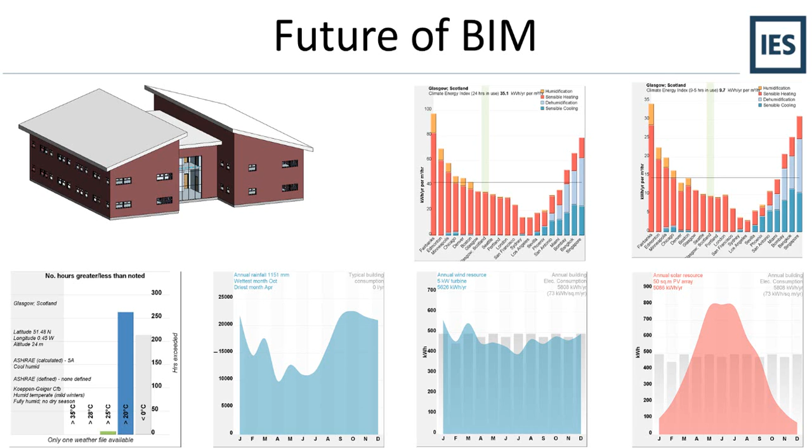So moving on from there, looking at how we see the future, instead of looking just at the asset in an isolated situation, we could look at the asset at a master planning level. For an office building, you could consider how far it is from transport links, or what's the nearest shops available if you're putting an office in a certain location within a certain district of a city.

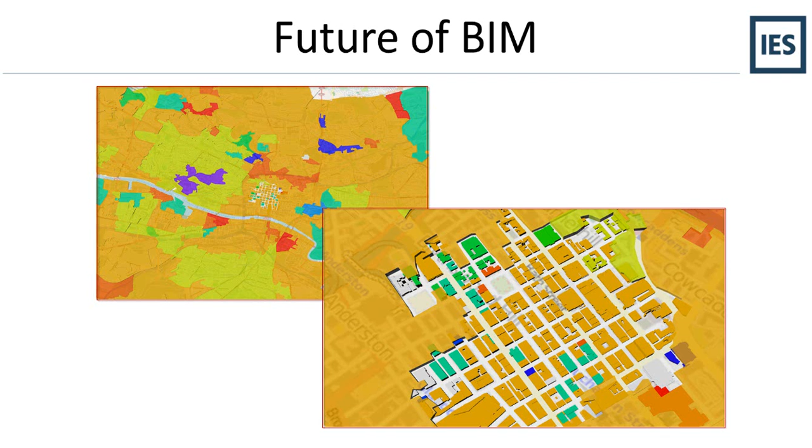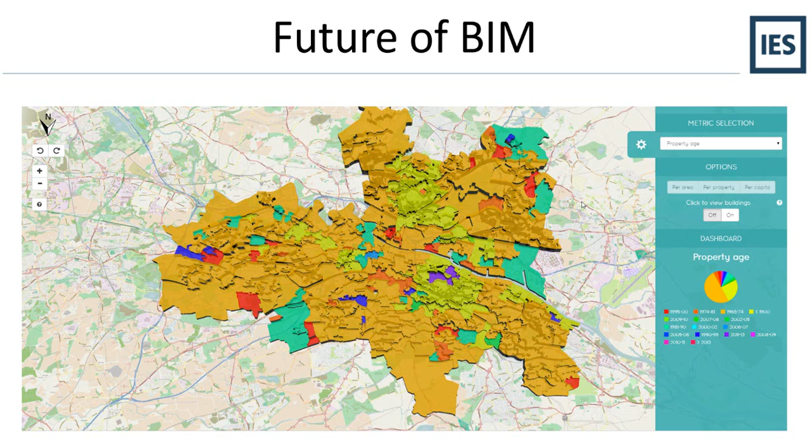That would be a district level. Taking it up a level again, we'd look at the city level - instead of a single area of a large city network, you would look at the whole city and the building performance and embodied carbon within that as a whole. That's where we'd see BIM going in the future, being able to access different levels of data, different levels of granularity, whether it be a single asset or multiple assets.

I'm sure the majority of you have seen this extract from PAS 1192 Part 2. Just a quick overview - you've got your central area here, governed by BS 1192 2007, which is basically your common data environment, the standard methods and procedures for taking a design from brief stage right through to operation.

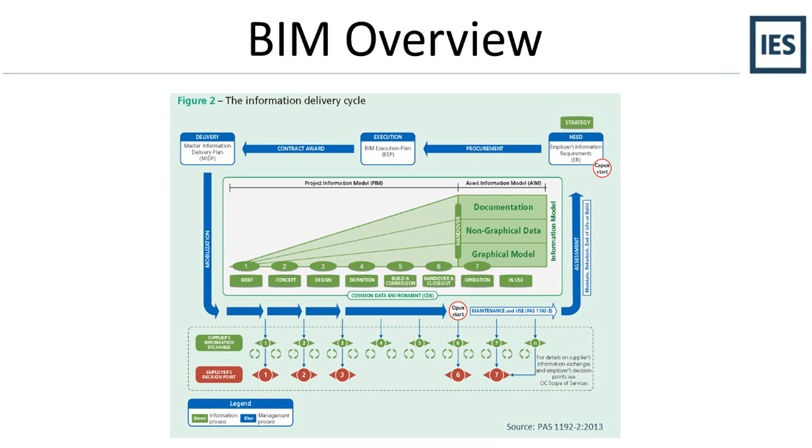You've then got the information delivery cycle in blue surrounding this, which is the PAS 1192 Part 2, Part 3, and other documents like Part 4. All these documents go together along with the BIM protocol and government soft landings to make up a set of standards, methods and procedures that allow you to deliver information with no data drop-offs from the very early briefing stage right through to operation. That's a small, brief overview of the BIM process and some of the documentation.

Now, this is another graph you've probably seen quite a lot, and the reason I want to bring it out again today is to highlight the position of building performance within the building information modelling process. You can see the blue line, line 1, is the ability for a team to impact cost and performance as you go through the project from early design phase right through into operation.

The red line, line 2, is the design cost of making these changes as you go through the process. You've got the black line with the hump in the middle, which is the traditional design process, and then the green BIM workflow, where you can see the humps move back, so it's easier to impact cost and performance at a lot less cost.

From a building performance software perspective, this is best placed early on in the design, as you can get a lot of data gleaned from the design brief. As I've said, you don't need any geometry to start getting data out, and obviously you need to feed this back into the design process all the way through.

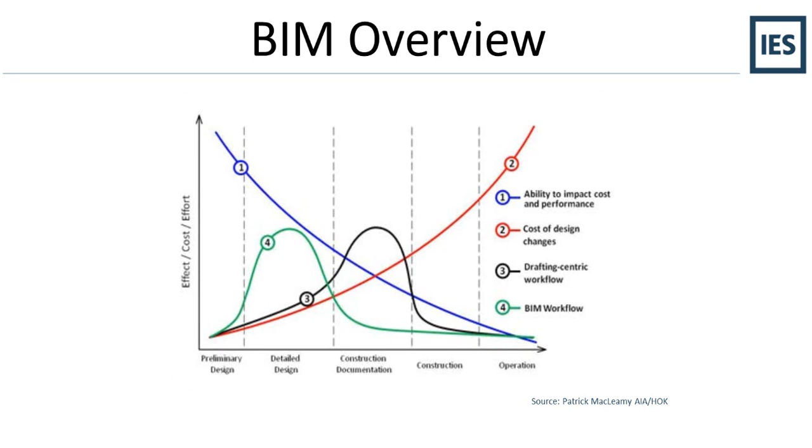So how can we do it, and how can BIM, building information, relate to building performance? Here we've got an example - we've got a mass model for a building, and we can export that. The image you see at the top left is a Revit model.

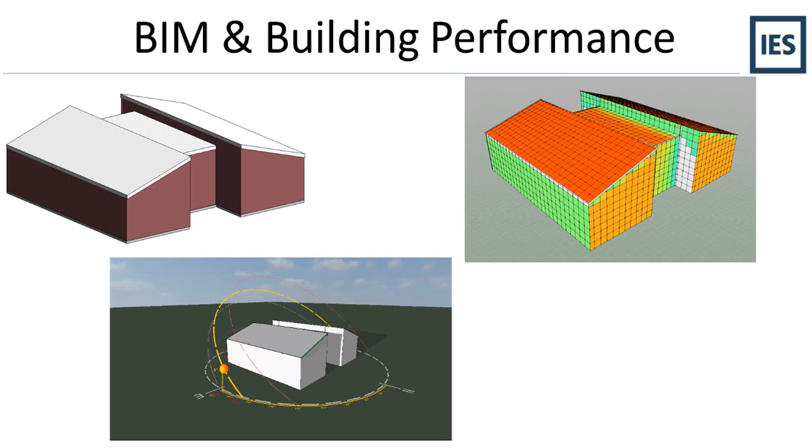So it's been exported into the virtual environment, and you can quickly see some shadow analysis, some solar intensity analysis. Fairly early stage, just having a mass there. So we can take that design and move it to another level.

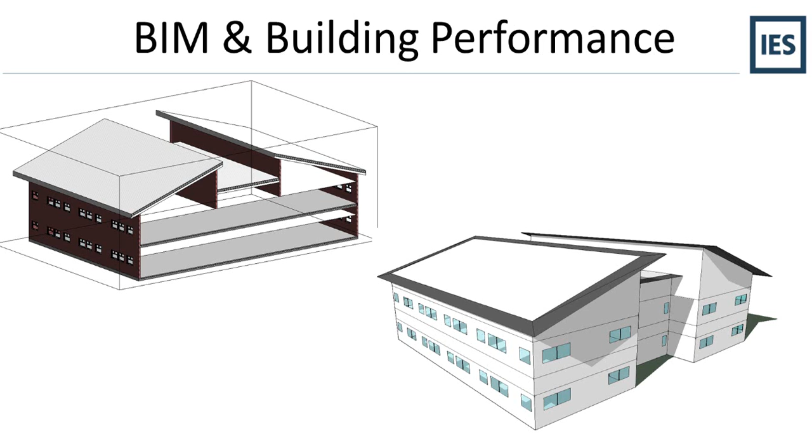We can start zoning up that mass and adding in a bit of glazing. And again, we can export that and start running some analysis within building performance software. Again, take it a step further.

We can start putting in a bit more detail zoning. So we've got a core zoning there, and we've got a bit more curtain wall glazing, a bit more detail, and then we've got perimeter zoning, so we can start looking at daylight and maybe heating and cooling loads and actual overall energy performance of that building, until you get to the final detail stage with Part L compliance, your EPCs.

At this point you can see you've updated the model, you've actually got specific zones that have been allocated to the design. So we can take this on and again go and see if this building complies, and look at how it's going to perform in the future.

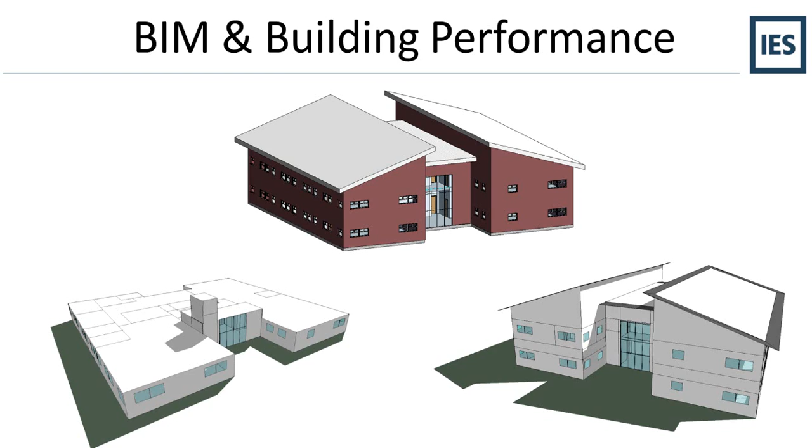So that's just a bit about how you can, these are models that have been built within Revit, and we've taken them into the virtual environment and run analysis on them, and it's fairly straightforward there. So I'll just come out of this and we'll have a quick demonstration of the process.

So here we have a Revit model. It's got glazing on it, and we'll have a quick look at the ground floor. You can see here now, whether it's Revit Architecture or Revit MEP, the main thing that you have to do, one of the main things is you have to add in spaces or rooms depending on which one you're using.

Obviously if you have got the full design suite, it doesn't matter which one you add. There are slight differences between the two, Revit Architecture and Revit MEP, in that with Revit MEP you can actually add in some more detailed data to your model and export that to the virtual environment.

Now, I am giving this demo using Autodesk Revit, but you can use any package that outputs an IFC file, a gbXML file. We can import that to the virtual environment. That's not an issue. So what we can do here, if I just select this space here...

So I'm just going to update. So if you go down and if you're using Revit MEP, these are the additional options that you can set. So you can see, you can go in and change any electrical loads. These are all default, you can see here.

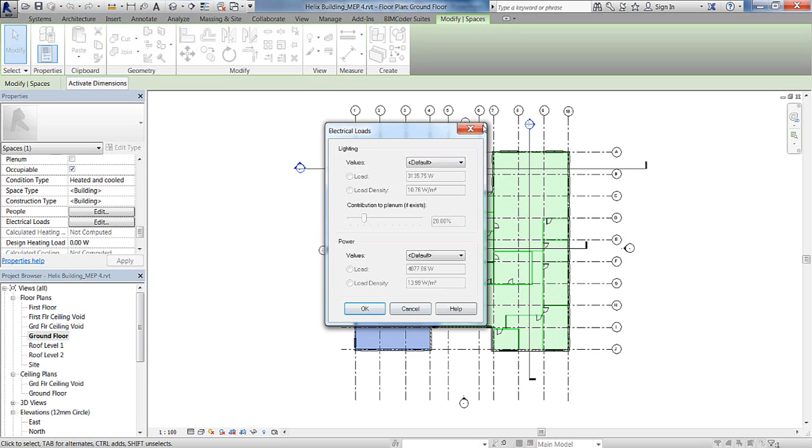If I just go into the occupancy gain, so it's changed off of the default, and what I'll do is I'll just change this, and I'll make it a silly large number. So I'll change the occupancy up there.

You can go in and also change constructions, or look at the space types. You can change these to here, or maybe you look at changing the lighting schedule, change the profile within there.

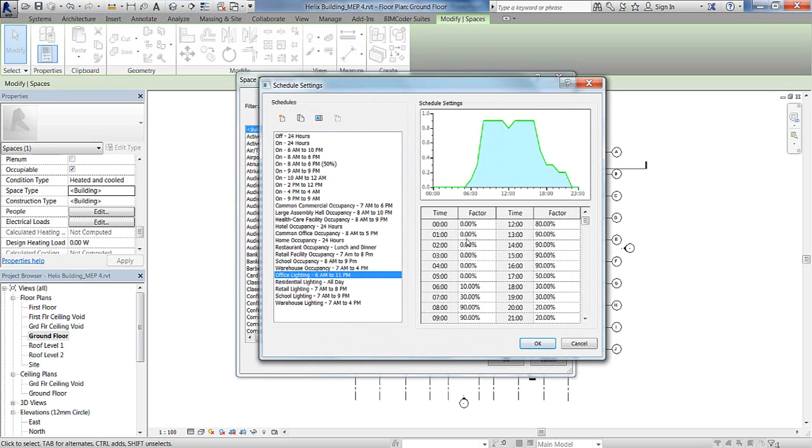So any of that data that you change in your properties for a space, since we're using Revit MEP here, then that will export across to the virtual environment, not a problem. So if I've made that change, I'll click on save.

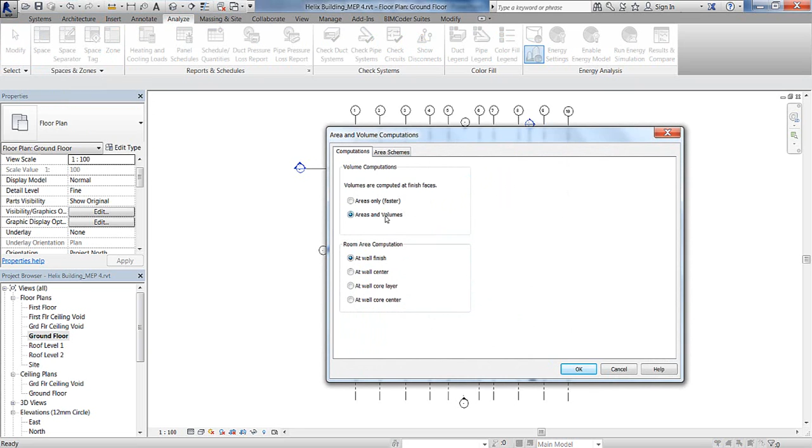So the other thing, because we're using, again, it's the same for whether you use spaces or rooms, you just need to check that the spaces and zones option, the area and volume has been set to include areas and volumes. That's key.

You then, if we go to the add-ins tab, to the VE options, now because I want to extract the data from the Revit model here, there is a settings option within here, a tick box, which I'll just open up and show.

Go to gbXML, override MEP transfer. I've unticked that because I want the data out of the Revit model. So I'll just OK that.

So I've got that. The other option you'll see maybe while it's in there is the complexity that I use. So there's the 5 options. Now these are mirrored as to the same export options that you have in the manual gbXML export from Revit itself. So basically you would use it depending on what you're trying to achieve in your simulations.

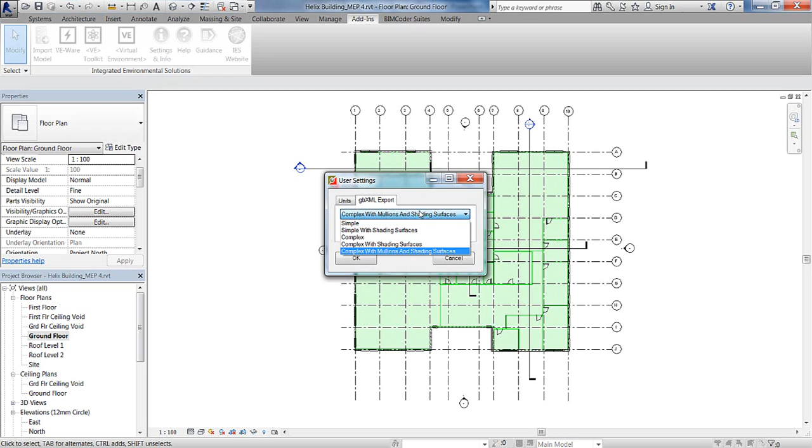So if you're looking at solar shading devices on the outside of your building, you'd probably say simple shading surfaces. But if you're actually looking at doing a lighting design, or it was a final detail design, looking at Part L, you maybe choose a complex with mullions and shading. So I'll just leave that at the most complex for now.

So I've okayed that. Again, because I've made some changes, I've gone in there, click save. So at this point, the key thing you can see here as well before I press anything, I've made sure that I've got...

There's no air gaps within my model. I've got a space or a room placed everywhere in my model. But what we'll do, we'll just go quickly to a section view.

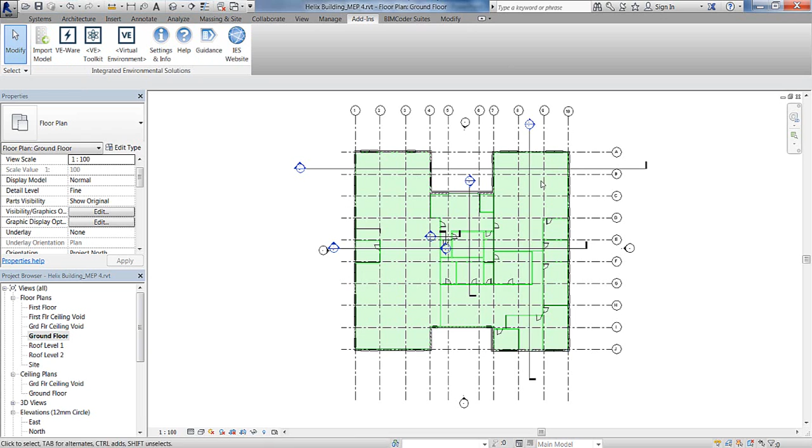And we'll just check that as well. So you can see there's no air gaps at all within the model. And that's one of the key things.

If you have any areas that do have gaps within the model, then this will come out as external air, and you'll obviously get external constructions applied to these areas. So that's why your full building envelope has to be fully bound and closed. So I'll just go to import model.

So that'll just run through. Down the bottom left hand corner you get a progress of information, and that'll just run through.

The main things you need to check: areas and volumes are on, and that you have placed a room or a space everywhere in your model, including risers and lift shafts, etc. You need to keep it simple and clean. The best way for creating walls is using wall centerline, and it's best to use basic concept walls, especially early on, and don't use any compounded ceilings. Using a compounded ceiling instead of generic can cause Revit GBXML issues, so if you keep it simple, it exports cleanly.

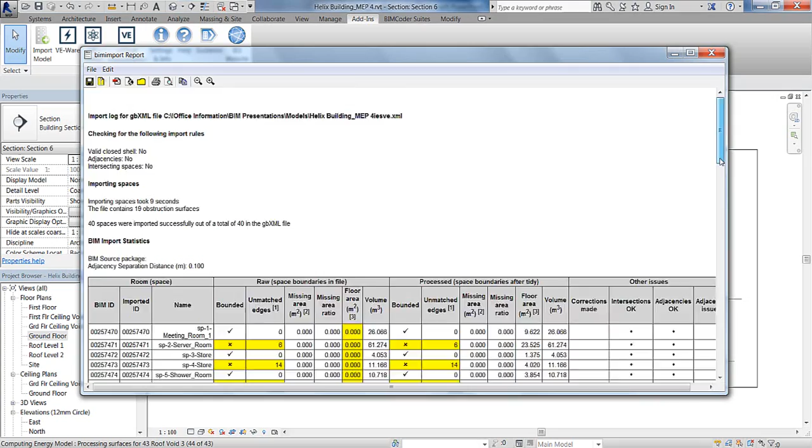Now you will get this, if you've used the plugin before, you've seen this BIM report, which basically looks at raw space boundaries before we've applied our algorithms, and then it shows you the work done by our algorithms in the background. Basically what we're trying to do is achieve fully bounded closed volumes with the surfaces orientated in the right direction.

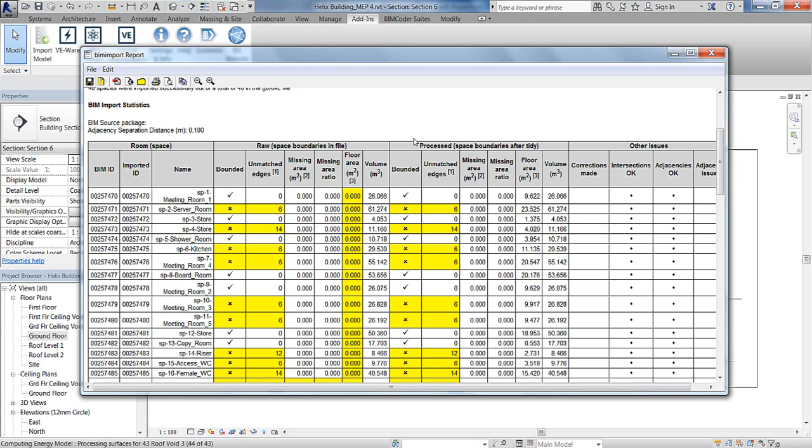These are the main kind of issues that we get trying to take geometry from other design tools to run analysis on. The one main difference at this point is if you're using Revit architecture, you will get a properties dialog pop up, and it will have a preview image in the model viewer that you can have a look at. That lets you look at the geometry at an early stage.

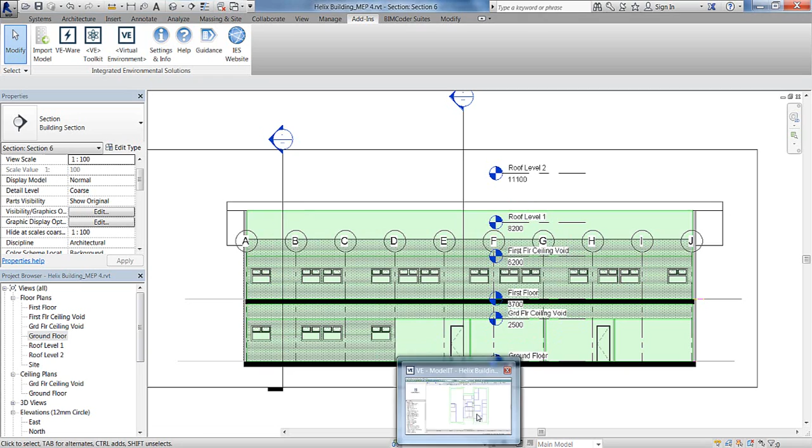Because I've used the MEP override transfer unticked, we're basically taking it as it is. So what I'll do is click on launch the VE now, and we'll export to the virtual environment. So we can see our model here.

I'm just going to flick into a front view and have a look at the geometry. I always like to check the geometry once it comes in, so I'll just have a quick look at that in the model viewer, see how we're looking. It's always good to give it a quick visual check. So, quite happy with that.

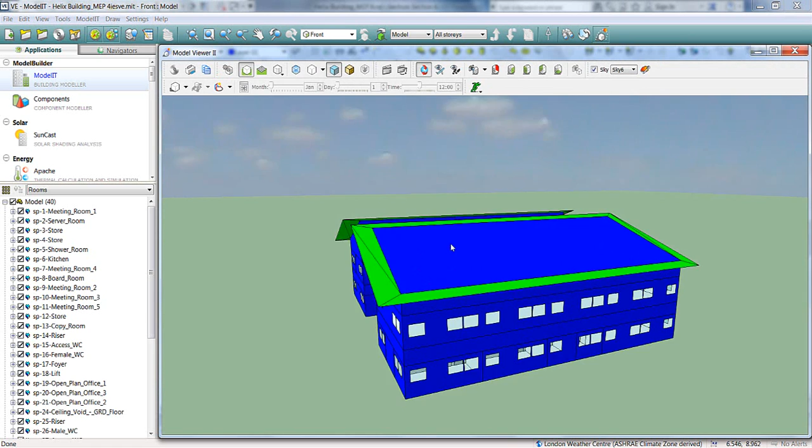At this stage you could quickly look at the shadows for your building, maybe run a quick check to see how it's performing.

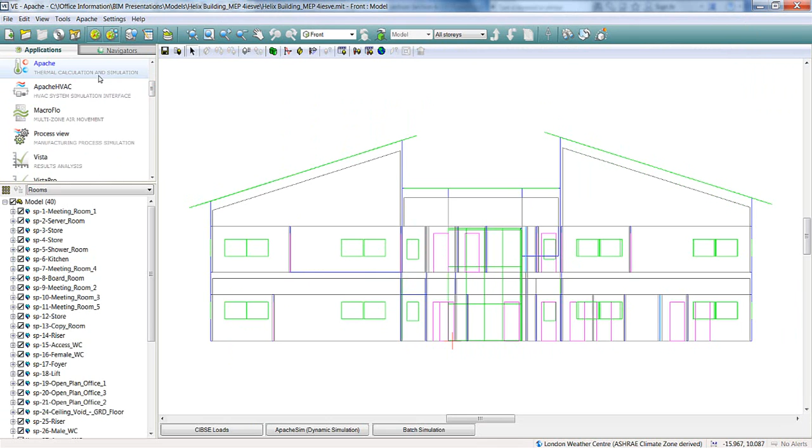So close that off. What I'll do, when we were in Revit MEP, we changed some of the settings. So just to show you that information, I'm going to go into our Apache thermal simulation engine, and I'm just going to select this model.

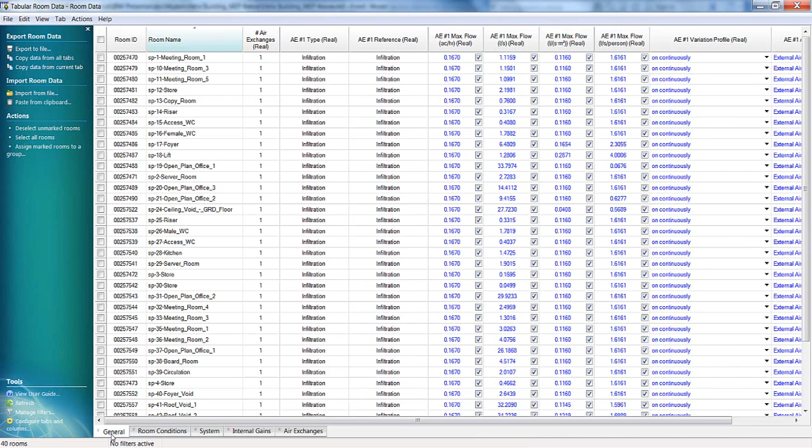Now you can go into our tabular room data section, which will give you your general information, your templates, room names. You can see all the room names that come across. It'll give you room volumes, floor areas, etc. In there you've also got room conditions and heating set points that you can go in and change.

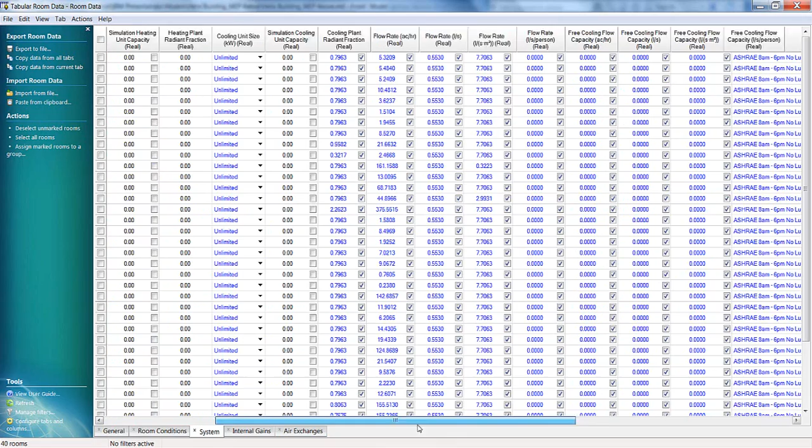If any of that you can check, if it's something you've changed, you can quickly update quite a lot of information. In the tabular room data area here, you can change and update that information.

Now, it's quite a lot. If you want to reduce it, you just select a single room and open this up, and it'll show you that single room, which I'll show you. So there you go, you can look at one room in particular.

Now that's obviously looking at the data listed out. You can also do this visually, so I'll just do that. So we changed our room conditions,

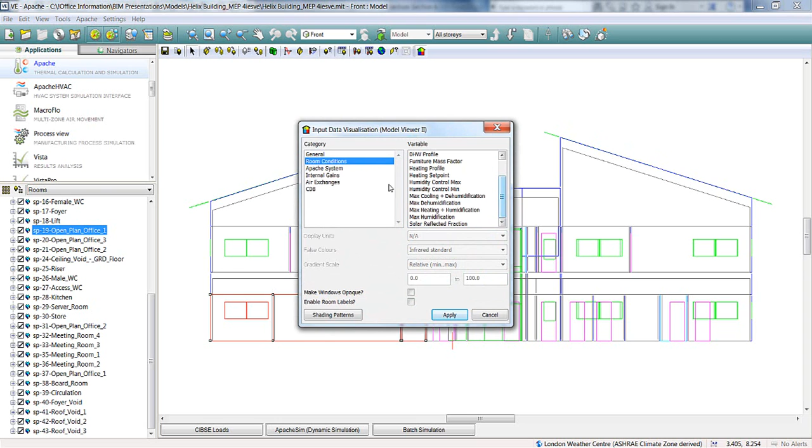and internal gains, and I'm going to look at occupancy. That was the one thing that we changed off default, so we're just going to display it as people.

Need to select the whole model, it's much better. So I'll do that again.

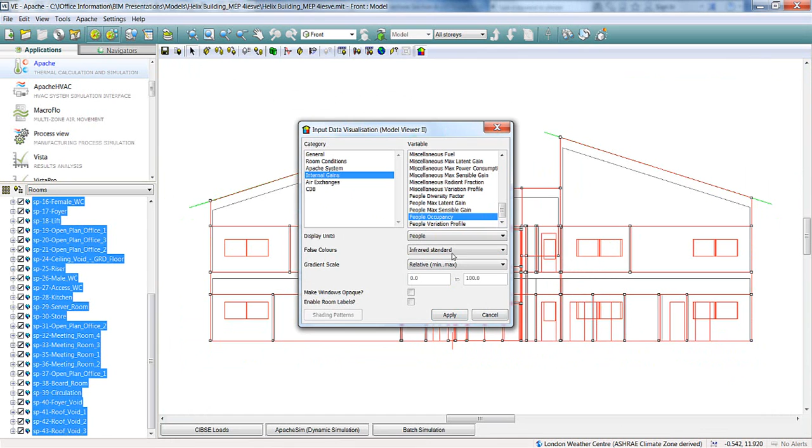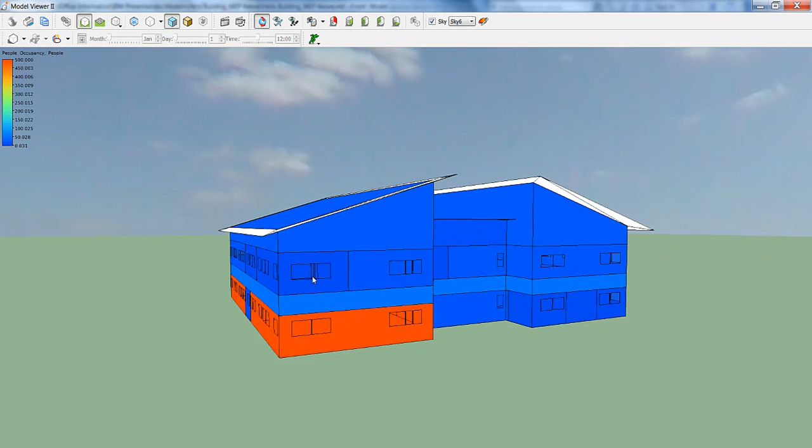So we can see here in the Model Viewer, if we look at the information bar on the left hand side, we can see that I changed the occupancy up to 500 people. We're quite busy in that office today, but it's very easy using the Model Viewer tool. You can quickly see what data you've assigned or edited that's come across.

So that's the Model Viewer, and that's the basics of exporting from Revit to the virtual environment. As I say, you can do this through any other package as long as it imports a GBXML or an IFC, and outputs a GBXML or IFC. You can bring it into the virtual environment, not a problem.

Now, the process that I've shown here is very linear: it's basically having your model in a design tool and then bringing that into the virtual environment analysis tool. Now, I won't touch on it just now.

There are ways that you can link these up so that you can push data back and forward. Later on, Jean Carré will go into a bit more detail on that process, and there are other ways of doing it, but this is just to give you a basic feel of how you export from another design tool into the virtual environment analysis tool.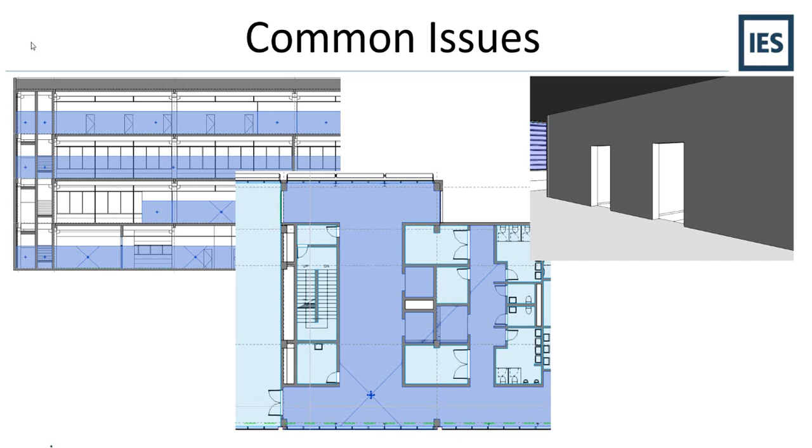Another issue you can see here is that there's riser spaces that haven't got any rooms placed within this model. So you're going to have big air gaps in the model, which we're not wanting.

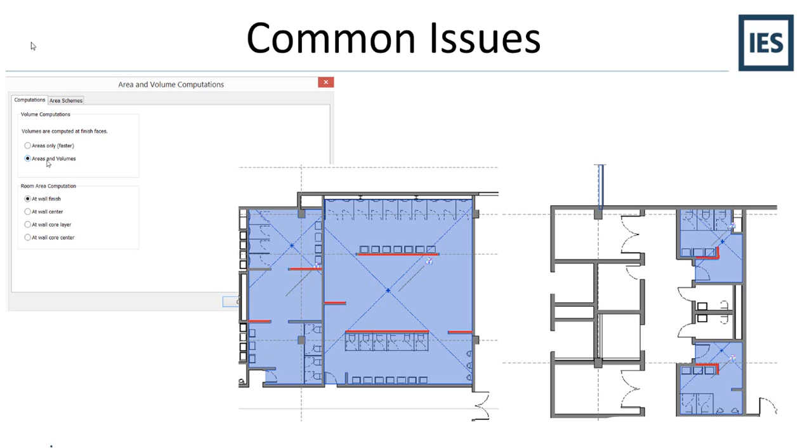Otherwise you're going to get triangulation and quite messy geometry coming out at the other side. Because they'll be set to room bounding, they'll just interfere with the GBXML file and won't make that room come across cleanly. Again, some more of the same issues.

The room's not placed. You can quickly throw a section through a model, turn the room fill on, and you'll see where the gaps are within the model. I've highlighted in the centre here that one room and concentrated on the levels that it's tied to.

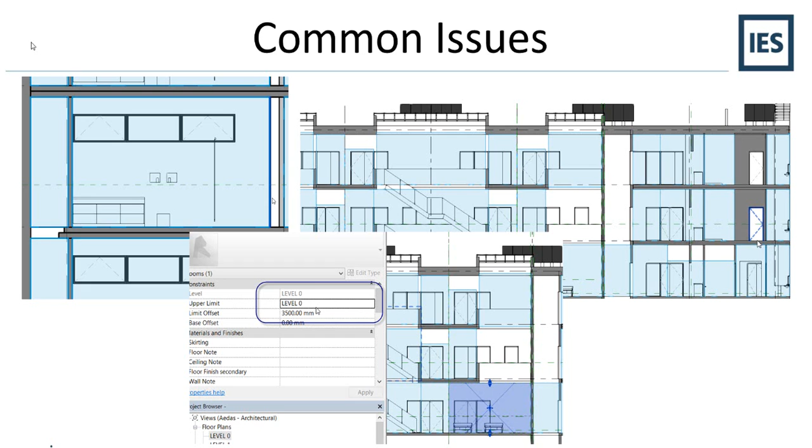One of the key things that you should do when you're placing rooms or spaces is add in levels to tie these to. One of the advantages is if you do change your levels in your design at any point, all your rooms or spaces will move up and down with the levels they're tied to. But it also makes sure that you've got no air gaps between each floor.

We've made some updates in the latest releases. Before, we were just allowing you to include whether you tidied up where the columns are. Now that option relies on that being written by the software we're receiving the GBXML from, written in the right format - so columns need to be called columns. If they are, hopefully they'll be ignored if you want. If they're not, you just need to set them in the model to non-room bounding.

We've added a bit more detail to how the geometry comes across, where it says there's an attempt to fix shell or surface orientation. It did that automatically in the past, but now we're allowing you to turn it on and off if you wish. We've added the ability to increase the number of edges as well as the number of surfaces in a space boundary - so if you've got a bit of messy geometry with lots of edges and surfaces, we'll tidy it up to the values that you put in there.

Now if all else fails, we'll move on to option B, where we'll just throw all that geometry away. We'll take the floor plate and basically try to extrude a volume from it. And if that does not work, we'll just bring across what we see as shading devices. So if you open up your model and see a lot of green surfaces that don't have closed off bound rooms, it just means it's not been defined in the GBXML geometry source from the likes of Revit, ArchiCAD, or Bentley systems.